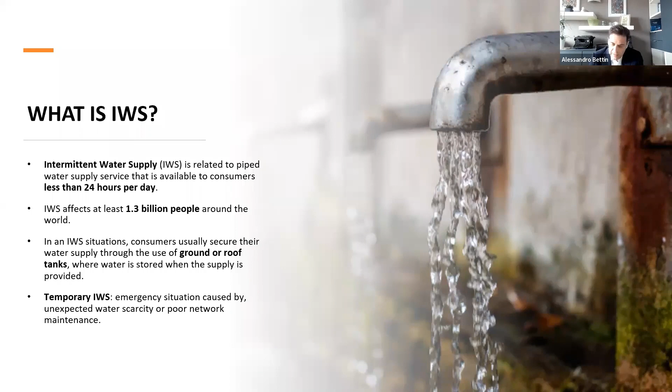A special situation is when we have temporary intermittent water supply. This is due to unexpected reasons like drought, pollution of water resources. And this reason brings the shifting from a continuous normal supply to an intermittent supply. There are several cases of this kind of situation. And if not resolved quickly, a temporary emergency can easily turn into a permanent intermittent supply, with all the negative consequences on the network integrity.

Why is intermittent water supply globally increasing? There are several reasons. The first is increasing water scarcity. Due to changing precipitation regimes caused by climate change, periods of drought are more and more frequent and are most of the time followed by floods. This situation, of course, is very negative for the water supply, and water operators sometimes have to shut down the water, mostly overnight, in order to cope with the new emergency situation.

We also have another reason: the continuously increasing demand. Water demand has tripled globally during the last 50 years. It is expected to increase 20 to 30% by 2050. Urbanization is also increasing. More than 50% of the world population live in urban areas, and it is expected to rise to 68% by 2050. Last but not least, there is a huge amount of water loss worldwide.

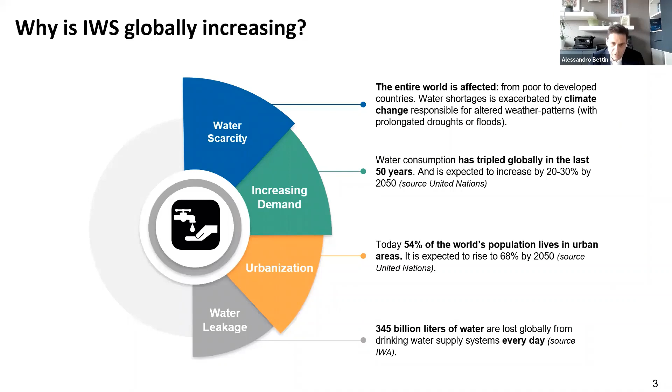It is estimated that more than 340 billion liters of water are lost globally from drinking water every day.

So which are the main characteristics of a network affected by intermittent water supply? High level of leakage - we can have a level of leakage even higher than 50 to 60% of the input volume. Low pressure, generally low pressure, even less than 10 meters. We have air in the water pipes.

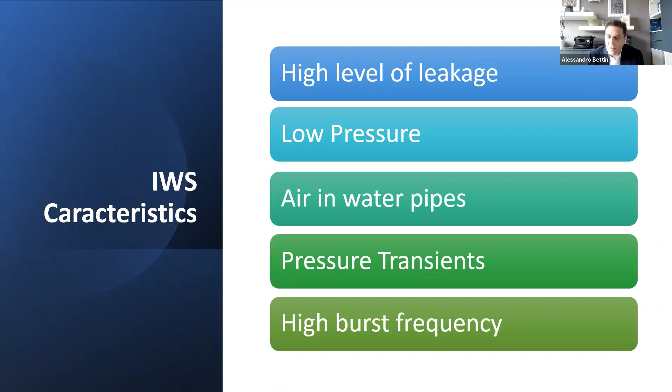Air in the water pipes enters during pipe filling when the valve is opened - for example, the valve of the reservoir is opened to fill the pipe. Pressure transients occur due to the filling and emptying of pipelines under intermittent supply, and due to these pressure transients, we have a normally high burst frequency, so a high level of natural rate of rise of leaks.

Let's see which are the air problems in water pipes. First of all, air generates problems of pressure transient. We will see that a small accumulation of air inside the pipe can have adverse effects on pressure transients, increasing the magnitude of the transient.

Then we can have flow reduction. Flow reduction is determined by the air pocket standing in the pipe, which can reduce the effective pipe cross-section, resulting in a reduction of the pipe's effective capacity.

We have greater erosion for metallic pipe, for ferrous pipe. The presence of air increases corrosion by making available more oxygen for the oxidation process.

Then we have a pump efficiency reduction, as can be seen from this picture, due to the higher head loss. If the main line has air inside, the pump pressure has to be increased, resulting in a loss of efficiency.

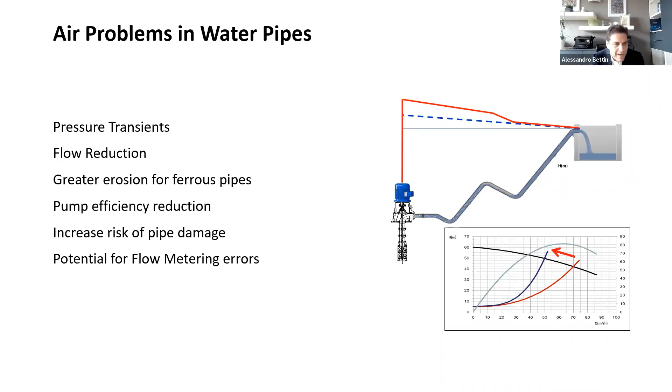And finally, we have also a potential for flow metering errors, because air bubbles in some cases can inhibit the propagation of ultrasonic waves in ultrasonic meters.

So let's see now air origin and transport in water pipes. We're still speaking about theory.

We know that at normal temperature, there is a 2% saturation level of dissolved air in the water. But with low pressure and high temperature, air comes out of solution and accumulates in the system.

Air inlet and transport is determined by filling and emptying of the pipeline, and this is a typical situation of IWS.

There are several kinds of air pockets. Air pockets can be transported with the flow if the gradient is small, but can also be trapped with steeper pipe gradient. From these two pictures, the upper picture shows an air pocket in a horizontal pipe, elongated and very thin, while the other picture shows an air pocket with a wedge-like shape in a steeper slope pipe.

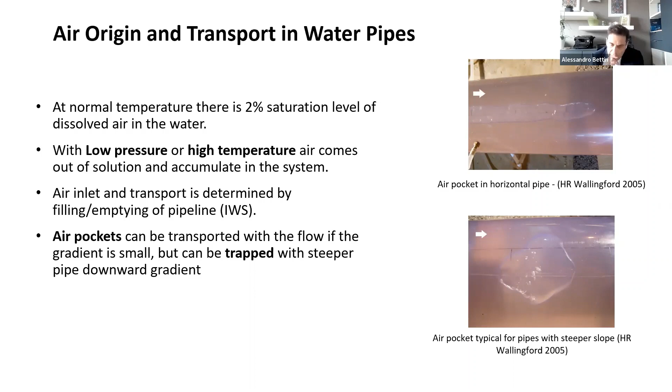Let's see the effect of air pockets of various volume on pressure transient, after pump shutdown, in an experiment carried out. We see a transient with three conditions: the first condition is no air, shown as the continuous line. Then we have a volume of air of 0.7 cubic meter, shown as this line. And then a smaller air pocket, shown as this dotted line.

We can see that air pockets can be beneficial or detrimental depending on the volume. A big volume of air reduces the effect of pressure transient, while a smaller volume of air increases the effect of transient.

It can be seen that single air pockets with small size and multiple presence of air pockets in the pipeline are shown to be problematic without any protection, increasing the effect of the normal pressure transient.

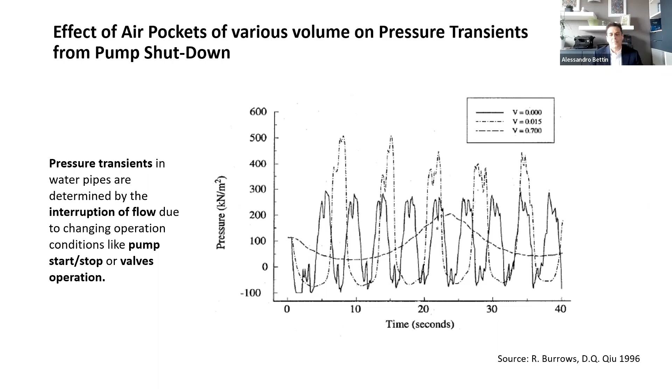After this introduction on pressure transients and their effects, let's see in detail the systematic approach that can be carried out to bring an intermittent water supply, generally a temporary intermittent water supply, to a 24/7 continuous supply.

We have several stages. The first one is a situational assessment, where we need to assess network analysis, check if there is enough water available to satisfy demand, measure the leakage in the system, and also carry out monitoring of flow and pressure.

Then the second stage is implementation of district metering. Then we have air control and pressure transient control. As we are seeing, air is detrimental for the functioning of the water supply system during intermittent water supply, so the task is to select the suitable position to install air valves in order to reduce the pressure transient.

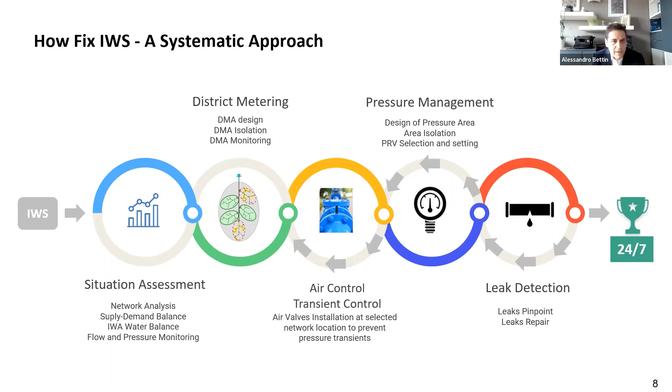Let's see now one by one in more detail the several stages.

Situational assessment: first of all, we have to know the network. It's very important to build the network schematic, how the supply is generated, and to collect all the data necessary to carry out the water balance, because leakage estimation using the minimum night flow, the standard method, most of the time is not possible with intermittent water supply, because during night the service is shut down.

If we don't have the data from SCADA, we have to measure the flow, and in any case flow and pressure monitoring is mandatory to understand the network, and then carry out the water balance, for example for one week, if we don't have any other data. And of course, we have to evaluate if the available water resources are enough to satisfy the demand.

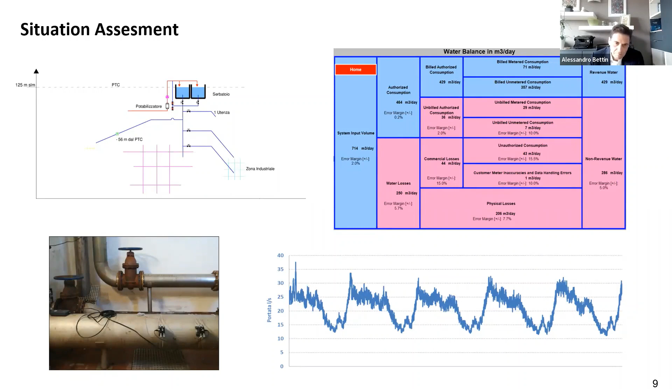Second stage is district metering. District metering is the most reliable methodology to carry out an effective non-revenue water control in the system.

Normally, the network is divided by sectors, possibly fed by only one meter, but they can be two or three. The sectors are created by closing the boundary. The flow in each sector is measured, and in this way it is possible to quantify leakage in each DMA.

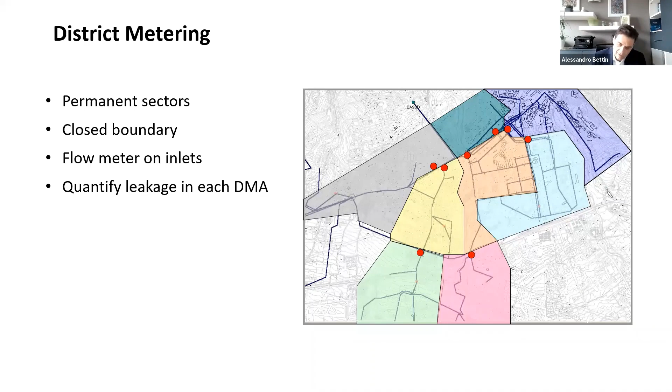Air pressure transient control: after the creation of the DMA, we have to make an analysis of the pressure transient, and select some suitable points to install air valves in order to eliminate this extra air inside.

Air valves should be considered to reduce the pressure transient effect, and they normally have triple actions: evacuate air bubbles in normal condition, evacuate air pockets and large volumes of air trapped inside the pipeline, and introduce air into the system to prevent vacuum conditions.

They should be installed where a flow variation is expected, for example at the outlet of a pumping station, at the outlet of a reservoir where the opening and closing valve is activated to fill the pipe, and at high spots.

Other valves that are useful to calm the network are pressure release valves, which protect pipelines against overpressure due to sudden changes of regime in the network, for example downstream of a pumping station, in order to prevent water hammer and transients.

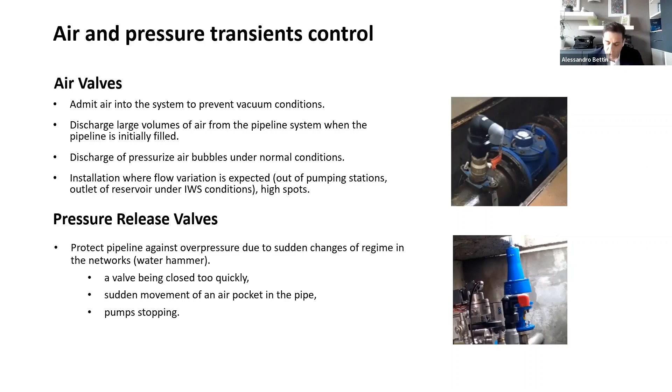A very important task is pressure management. Leakage rate is proportional to pressure, and if we reduce pressure, we reduce leakage. So it is a very cost-effective way to reduce leakage by implementing pressure management.

There is a physical relationship between leakage flow rate and pressure, as you can see from this chart. The power factor N1 of the formula varies from 0.5 for metallic pipe to 1.5 generally for plastic pipe. In a standard design situation, we can consider an average value of 1 in order to estimate the effect on leakage from a pressure reduction in the system.

Best pressure zones are characterized by only one inlet, where a flow meter is installed and where a pressure reduction valve is installed. There are several benefits from pressure management: reduction of leakage, reduction of burst frequency, and protection of assets.

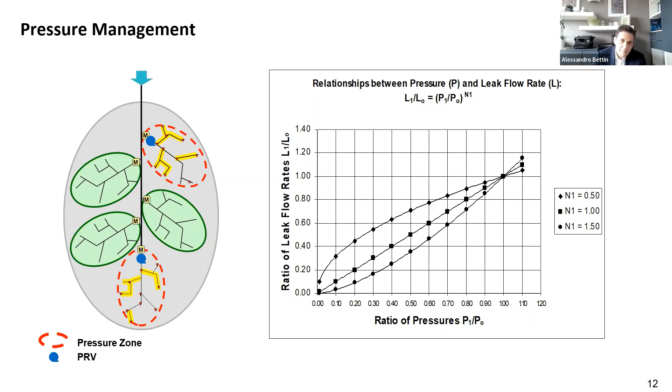This is an example of a pressure management implementation, a case study in Italy. We started from 80 meters of pressure. It was a lower district, a small lower district with very high pressure.

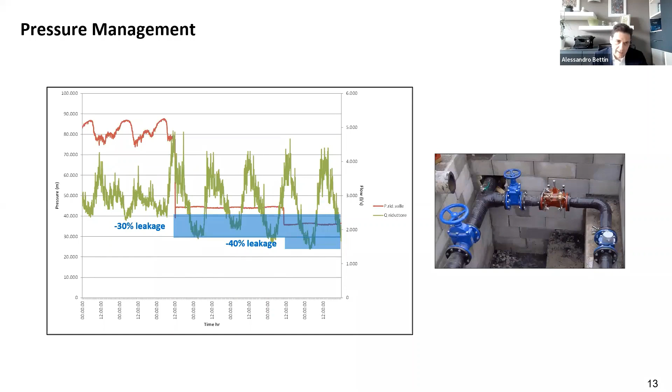A pressure reductor has been installed, and the first stage was to bring it from around 80 to 45 meters. We obtained suddenly 30% leakage reduction. Then with a further setting to 35 meters, constant all day, we had 40% leakage reduction.

This is another case study where we can evaluate the combined effect of pressure management and leak detection, in Sardinia, Italy, where a reservoir fed 5 DMAs. In 4 of the DMAs, 4 pressure reduction valves were installed with a day-night setting, and the average pressure reduction was 15 meters.

The effect of pressure reduction alone was a 16% reduction in the minimum night flow, and therefore in leakage. This is a daily chart of the total flow.

Then after pressure reduction, all the leaks found were pinpointed and repaired, and we obtained a further 50% reduction. So in the end, the combined effect brought the minimum night flow from 30 liters per second to 11 liters per second, stabilizing the pressure completely.

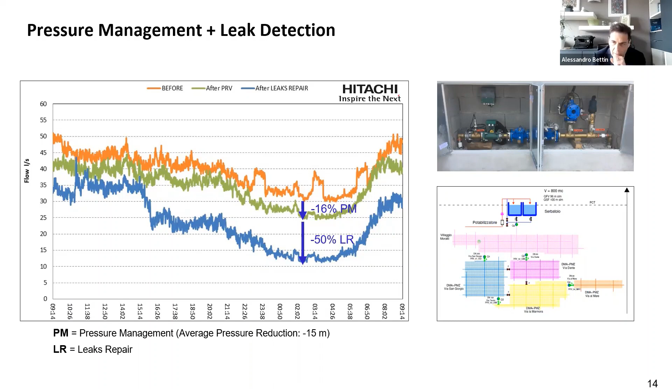The last stage of the systematic approach methodology is leak detection. Leak detection is very important because it is the final step, and if it is well carried out, it can bring very important results in terms of minimum night flow reduction.

Leak detection starts with leak location, which can be carried out by implementing step test analysis in the network in order to find high leakage areas, or through noise logging. Noise loggers can be deployed depending on the network cost-benefit analysis in order to carry out automatic scanning.

Leak pinpointing is then generally carried out with traditional activities such as sounding and correlation. Correlation is used to pinpoint the precise location of the leak, while sounding is used to hear the noise from any fitting in the network in order to find the possible location of the leak. Another technology sometimes used is tracer gas, to pinpoint difficult leaks in conditions of low pressure.

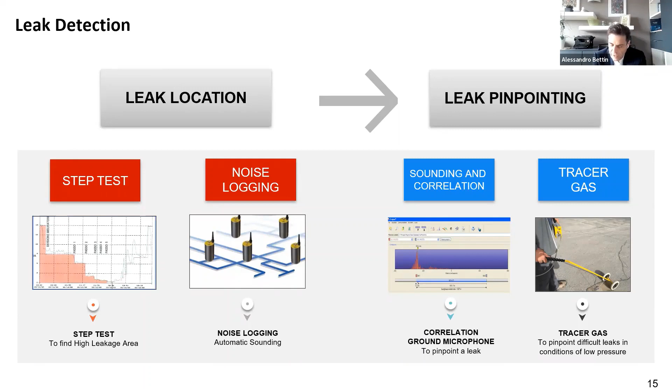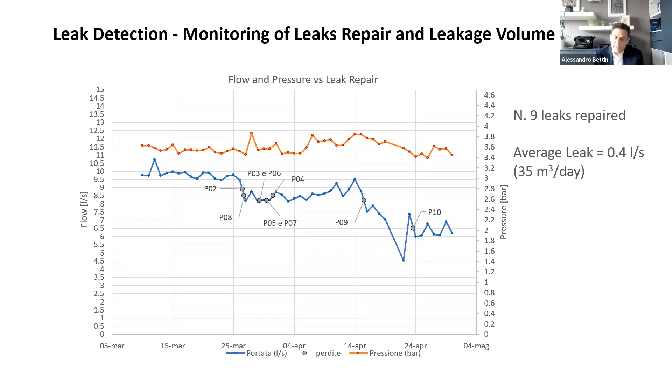This is an example of how leak detection and repair can be monitored in order to evaluate the leakage volume recovered. There are 9 leaks repaired, with the point of each leak repaired marked, and we have the pressure and, in blue, the flow, and we see the reduction of the minimum night flow. So 9 leaks repaired, measuring the difference in minimum night flow after minus before the leak repair. We evaluated 0.4 liter per second per leak, and 35 cubic meter per day.

So let's see now the case study from temporary intermittent water supply to 24/7. This is the first case study that I would like to show where the integrated systematic approach has been applied. We are in Norcia, Italy.

In Central Italy, there was a situation where, due to low precipitation, a strong decrease in available water resources has been experienced. Due to this situation, the operator shifted to intermittent water supply, closing the outlet of the reservoirs overnight in order to maintain the reservoir filled during the day.

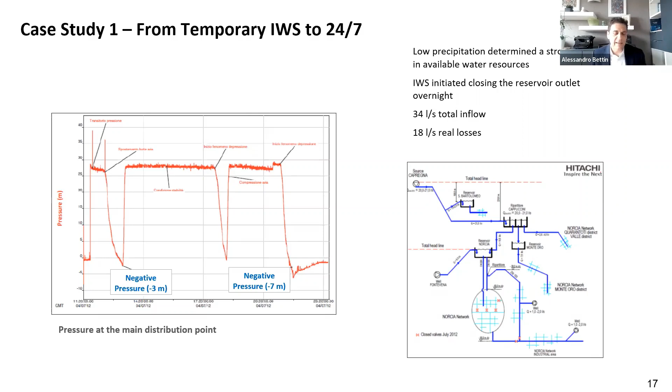Which activities were carried out? We set up 3 DMAs. We carried out the installation of an air control valve downstream of the reservoirs, at another suitable point of the network. We set up 2 pressure zones with 1 inlet, 1 PRV at the inlet, and then 20 leaks were located and repaired. There was an initial level of leakage that was very high, more than 50%.

So you see here the setting of one of the PRVs, day-night setting, with a different, lower pressure setting during the night when it is possible to lower the pressure.

And this is a comparison between 2 charts of the outlet flow at the beginning, when there was intermittent water supply, air in the pipe, and pressure transients. You see the irregularity of the shape of the flow and the minimum flow during the night when the reservoir is closed.

And this is the result achieved at the end, after the implementation of all these activities and the installation of this equipment. It is a standard curve of continuous supply, with a minimum night flow of 6 liters per second. This is one of the 3 DMAs.

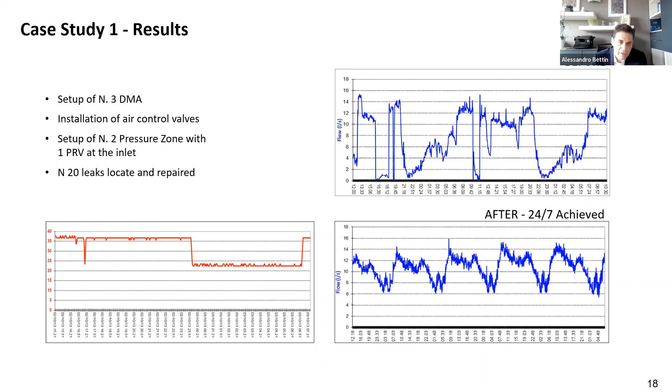This is another case study. Again, we started from a situation of intermittent supply with around 10 hours of supply per day, from 6 in the morning to 4 in the afternoon, and then everything was closed. We are in Vasto, south of Italy, where 20,000 users were affected by this intermittent supply.

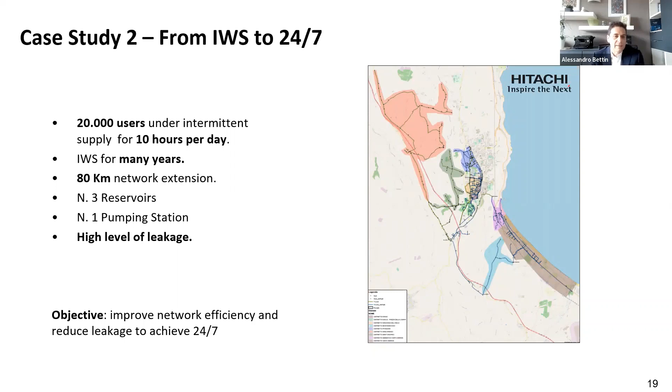There are 80 kilometers of network, 3 reservoirs, 1 pumping station. Mainly the supply is by gravity, and again there was a high level of leakage. So the objective here was to improve network efficiency and reduce leakage in order to achieve 24/7 supply.

9 DMAs were set up, checked, boundaries controlled and measured, 3 pressure zones created, leak detection carried out using sounding plus correlation, and 40 leaks repaired. One of the leaks was found to be 7 liters per second, pinpointed along a main trunk feeding the reservoirs.

This was a difficult leak, and for this leak a tracer gas was used after subsequent flow measurement, in order to select the cross-section where the leak was present.

And you can see here the result of the flow of one of the DMAs. In red, we see the initial situation: at 6 o'clock the opening with the peak flow, then stabilization, then the closing, because the reservoir was completely empty.

Then, after the implementation of pressure management and leak repair, we had continuity of supply, though of course limiting the flow a lot, the average flow to 8 liters per second, compared to before, when the system was operating at 17.5 liters per second.

So it is very important in a case like this, case of intermittent water supply, to optimize and reduce the pressure, because even a small pressure reduction can have a very important effect toward continuity of supply.

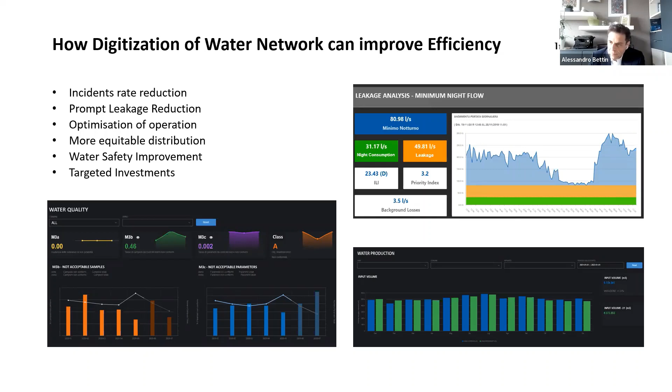Intermittent supply and water demand. It is not always a matter of water quantity. Here we are in Pune, India, where I collaborated on the implementation of the detailed project report for transitioning to 24/7 supply, and I was in charge of the part related to leakage management.

We carried out, around 10 years ago, a customer survey in some slum areas in India over a period of about one month, and found that consumption per person per day was 190 liters. This is more than enough consumption. The water supply here was 6 hours per day, so the situation was intermittent supply. The customers were not metered, and there was a high level of leakage.

Now, as far as I know, they have started to meter customers based on consumption, so probably the situation has changed.

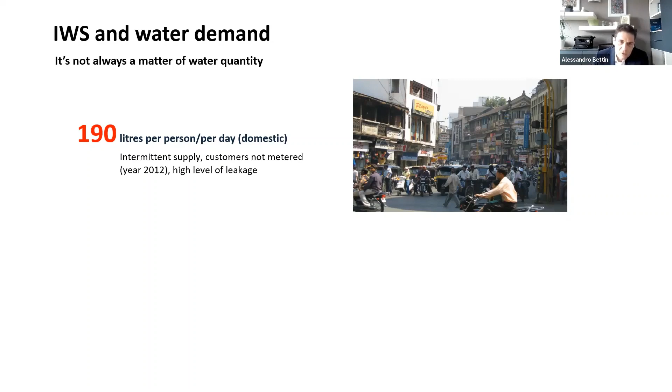I would like to show another situation that is of course not comparable: this is Copenhagen. It shows that the unit consumption per person can be lowered a lot. We have here 104 liters per person per day, only domestic, and the situation of the network is completely different, of course: metered customers, low level of leakage, and also high water tariff.

The tariff is for sure a leverage to reduce consumption, but that is another discussion that probably can be done in another webinar.

So we see that 104 liters per person is enough, but even less is possible. This is to say that in order to fix intermittent supply and bring 24/7 service, it is very important to also address the unit consumption. It is also very important to reduce consumption.

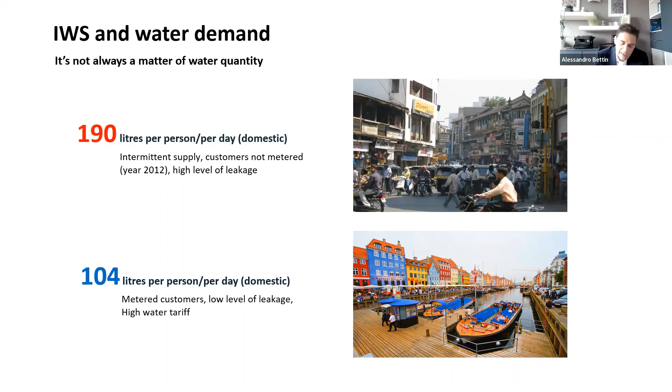So public awareness programs can be effective to achieve a reduction in water consumption and minimize waste. This is again the situation of Copenhagen.

I would like to show you, because in my opinion it's very interesting, the decrease in water consumption experienced in Copenhagen during the last 20 years, from 1997 to 2016. As you can see, domestic consumption decreased from 50 cubic meters per year to 38 cubic meters per year, a decrease of 25%.

In the same period, the population increased by 8.3%. But if we look at the green area, representing consumption from business and industries, there is not a big reduction, even if there is a small reduction in consumption.

But if we compare this situation with the increase in GDP during the same period, we see an increase of GDP of 80%. So if we consider the unit consumption per product, we can see that it really decreased. It would be interesting to compare this situation, which is of course one of the best in Europe, probably the best, with other realities, to see the trend of consumption at other water utilities.

In an increasing water scarcity environment, a responsible use of water aimed at consumption reduction, both for citizens and enterprise, is necessary. So it is not only necessary to apply the right methodology and the right approach with the best technology, but in order to obtain a better result, it is very important to obtain a more equitable and balanced water distribution.

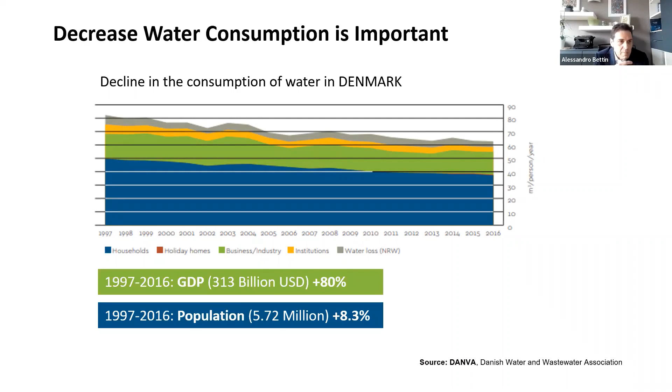This is the last slide. If you have any question, please fill the questions in the chat.

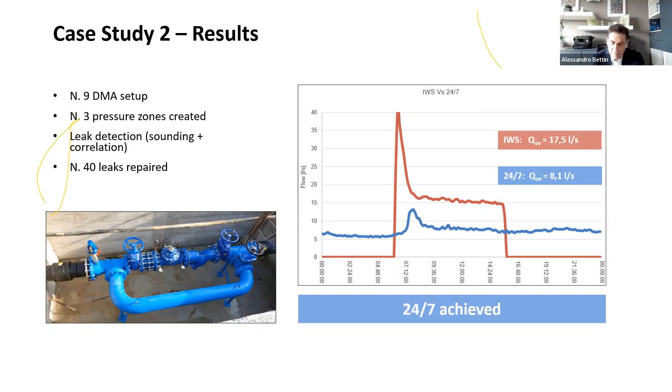Great, thank you. And another question is, is there any methodology for assessment of existing network pipeline systems in intermittent water supply situations? If not, what do you suggest?

For assessment of existing network pipeline systems, do you intend the assessment of the location of the pipe? I think probably you're referring to the first stage in the framework I presented, situation assessment.

Yes, to do situation assessment is the first stage. So it has to be carried out very deeply and with experience, because it is the first step to move toward all the other design and implementation. So the first step is to visit all the plants, reservoirs, pumping stations and so on, and to draw all the network schematics of these systems, to understand where the distribution happens, to locate the point for measuring all the flow. So the objective is to measure all the input flow from the network, from the DMA or from the sector that we are going to address.